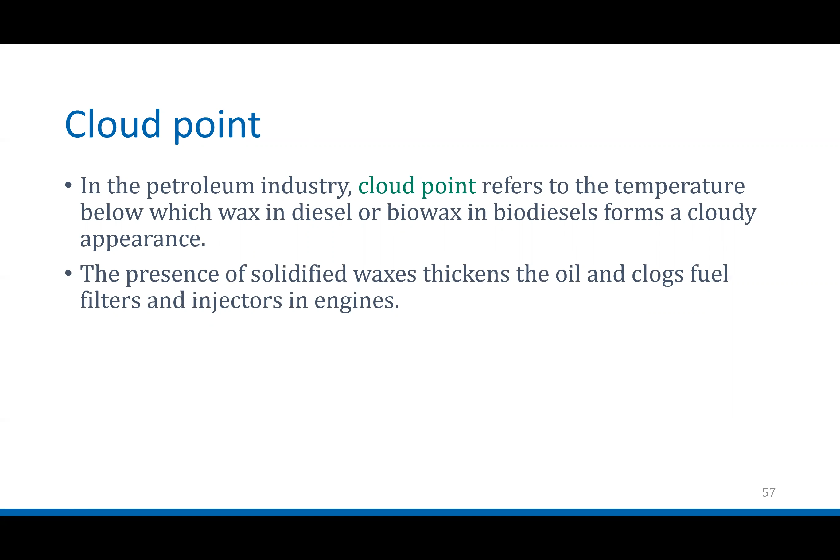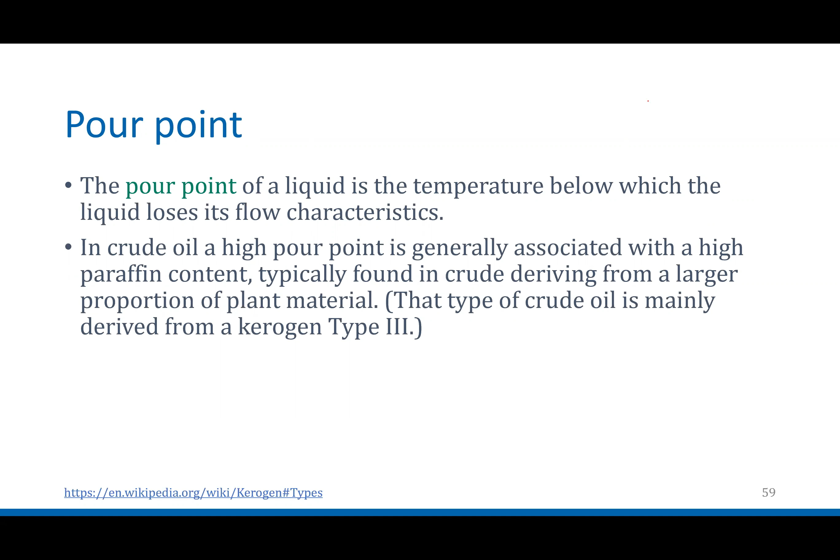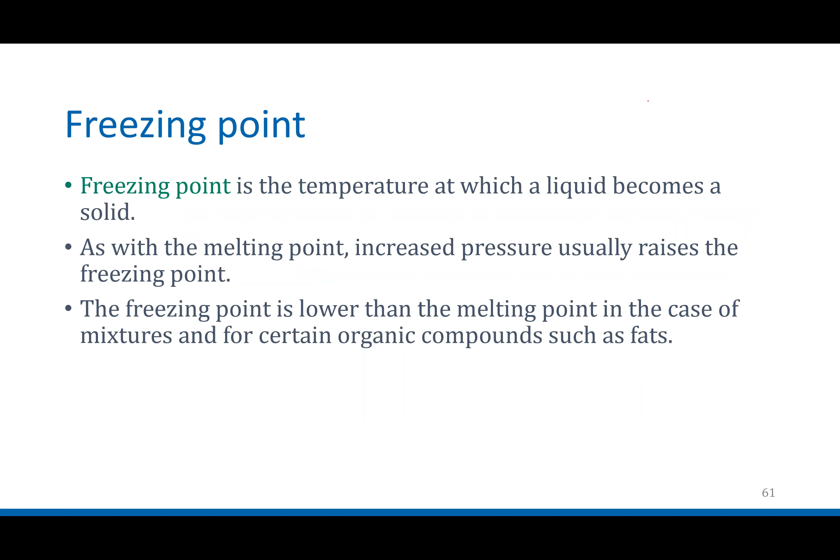This is the point - and when I say the word point, I always mean temperature. So the cloud point is the temperature when something goes cloudy. The pour point is the temperature in which something begins to not pour, it loses its ability to flow. Congealing point, the temperature where something congeals or solidifies. Freezing point, the temperature at which a liquid becomes solid, very similar to congealing point.

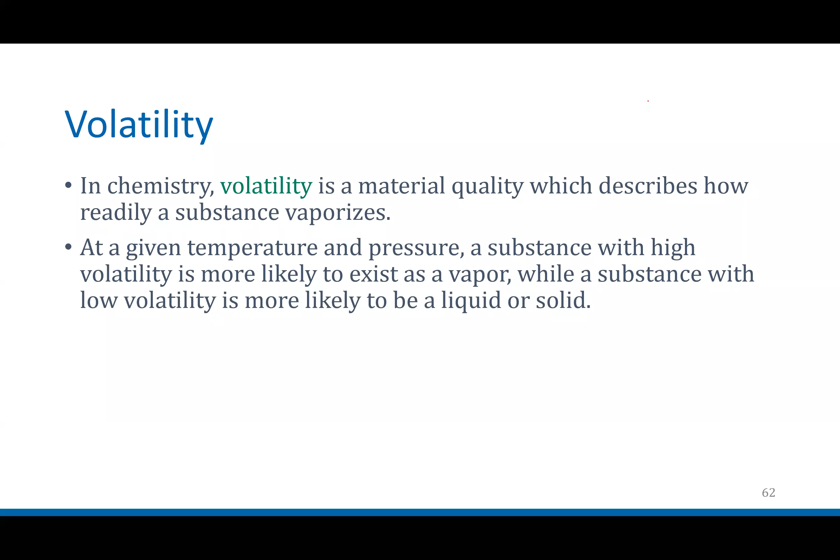Volatility is how easily a substance turns into a gas, which brings us to the flash point, which is the lowest temperature possible in which a chemical will catch on fire.

Which brings us to a safety thing, wink wink, kind of important to know. When a fuel or chemical has a low flash point, so the temperature it can ignite is lower than about 40 degrees Celsius, we call that a flammable chemical. So it's a safety hazard.

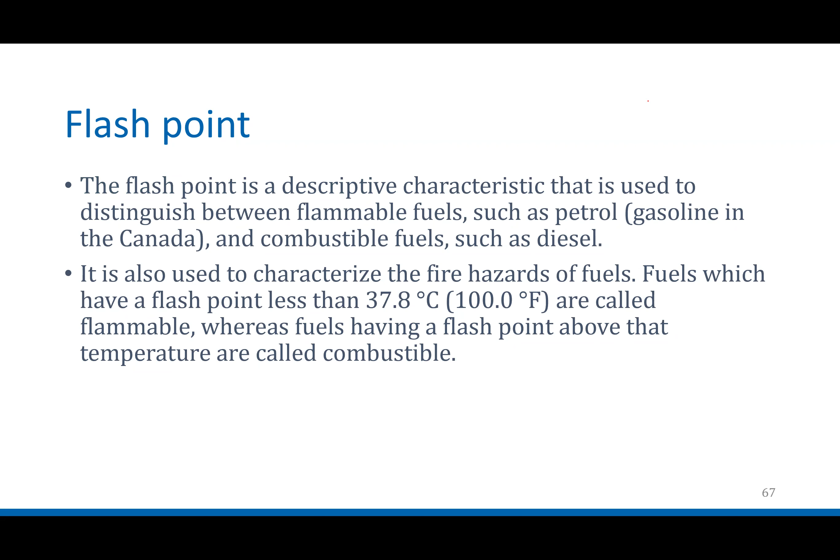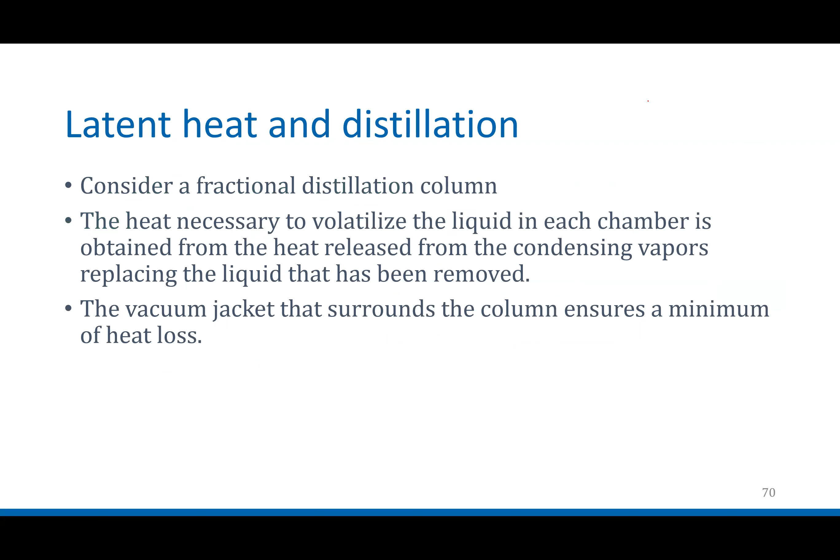And then we had specific heat and latent heat. These are related to the amount of heat something can absorb, and in particular, the latent heat of vaporization is the amount of energy something can absorb to turn into a gas.

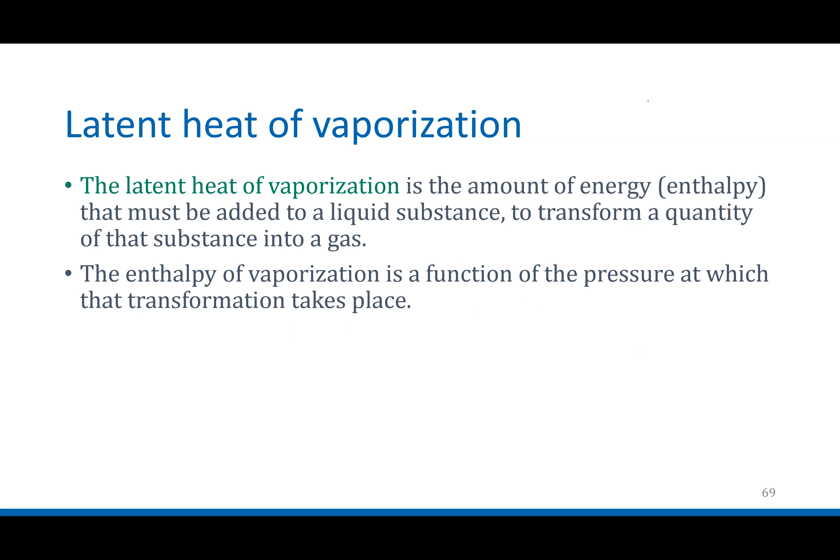So all pretty easy definitions. I just very quickly explained them all in, I don't know, 2 minutes. So let's get into this section. I would love to finish this today, this section, and then that'll get us ready tomorrow to get into the section that your lab will be on.

Okay, so physical properties of petroleum. Remember what physical properties mean - they are definitely not related to thermal properties. So this is like the other properties besides heat-related ones. So physical properties besides melting point and boiling point would include things like density, viscosity.

What else are we going to talk about in here? Viscosity, surface tension, and really that's about it. So it's a pretty quick little class today, I think.

All right, so the API density. Now, unfortunately for the rest of the world, the oil and gas industry still uses a lot of American standards and even American numbers. What I mean by that is, it might be different in the Middle East actually, because I've never really worked in oil and gas here, but I know in Canada, just like Qatar, we're a country that uses the metric system. So we would use kPa for pressure, and we would use meters and kilograms. Well, I know the oil and gas industry back in Canada is heavily dependent on the United States, so we use things like PSI for pressure, pounds per square inch.

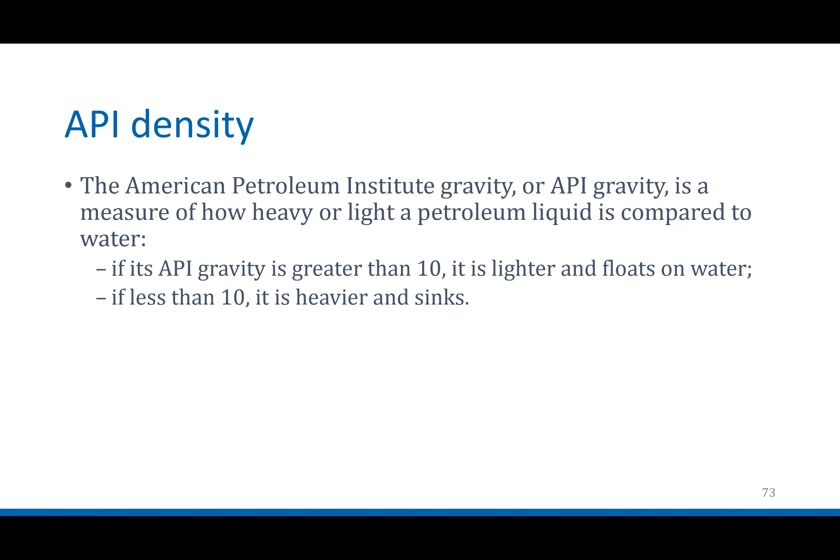And you guys should have done a course by now. Have you ever done a course, EN? I'm trying to think of the number. I taught it one time, like a million years ago. EN something something, like 27 something. It's a kind of an environmental course, but in that course you look at cleaning up oil spills. Not really relevant to this, but anyways.

So the API gravity, again, that's just density. Let me just check the chat here.

Yeah, EN 2480, that sounds really familiar. Years ago, 8 years ago, or maybe 7.5 years ago, it was one of my first semesters here, and they really needed some help in engineering. So I taught that course and another chemical process course. I think it was CH2420 or 2430. Very cool course, that one. Anyways,

So API gravity is commonly used around the world as an index. This is a number, a reference, for the density of a crude oil or refined products. So yeah, you can think of index like reference. It's the industry organization that created this, so it is used in different places in the world, even outside of the United States.

API is calculated using the specific gravity and then this formula here. Now, you do not need to memorize this, and we will not be doing this calculation in this course. The course outlines don't ask us to actually calculate this. We just need to know what it is, and you don't need to even memorize that formula.

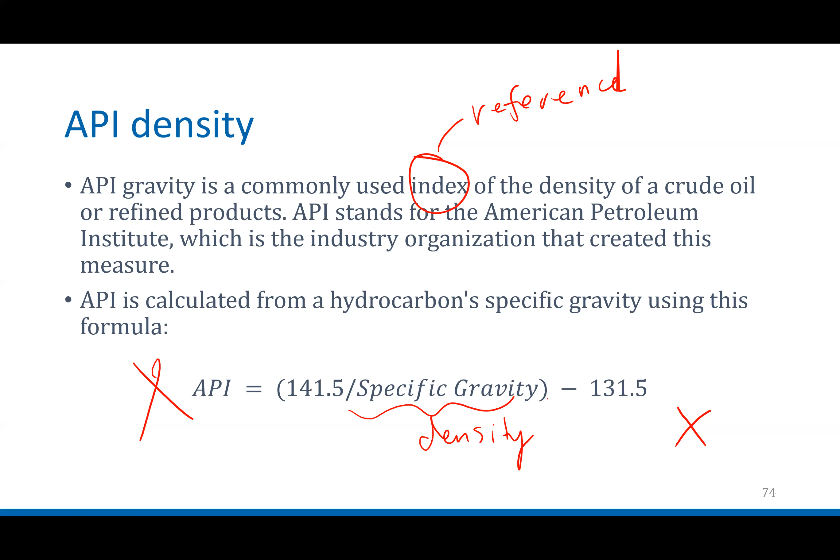But the formula is you take a number, 141.5, you divide it by the densities or specific gravity of the chemical, of the hydrocarbon, and then you subtract 131.5. No idea where that formula came from. Some crazy American mad scientists came up with it, but there we go. And you do not need to memorize it.

So this is why this is confusing, and we can thank the United States for this. The API density or gravity is an inverse - it's opposite of what we think, which just breaks my little chemistry heart. I don't know why they do this, but it's an inverse measure of the petroleum's density compared to water. Relative meaning compared. So what's the point? I've been kind of going on a rant about it, but what's the point? It's just a way to compare densities of petroleum liquids - how dense they are.

Now, in crude oil or something like that, these are obviously mixed together. We have nonpolar substances that form a mixture, a miscible solution, well, somewhat miscible solution. So it's a little harder to pick apart their densities. But when you mix something like a petroleum product with water, ones that are more dense will sink, ones that are less dense will float.

So a crude oil, now again, this is the interesting part about crude oil. It changes wherever you are. So the crude oil that we find in the Middle East is very different than say Northern America or Northern Canada. But typically, you can find them between 15 and 45. They use the unit degrees, but 15 and 45. These numbers, because they're greater than 10, will float on water. So there's obviously then not many crude oil products that are less than 10, meaning they would sink in water.

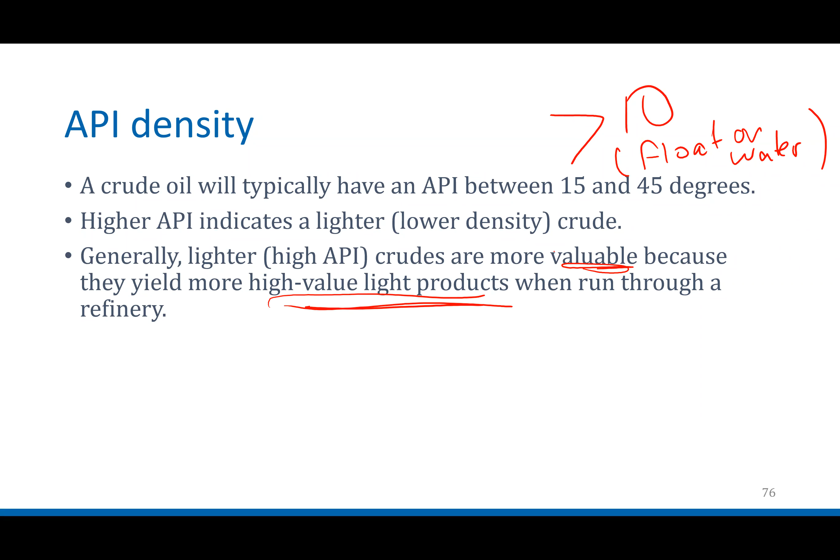Most crude oils in the world would float on water. Generally, the bigger the number - I think maybe this is where the Americans are going with this - the higher the number, the better it is, the more value. And that's, if you're thinking, maybe I shouldn't say this because I'm going to be on YouTube, but if you think about an American way to define something, it would be based on its value, right? And the higher the API density, the lighter it is. The lighter it is, the more valuable it is. So that's probably likely where the Americans came up with that number or this concept.

So this is a pretty, well, not that old - this graph is about 4 years old, maybe 3 years old. And it shows, now this is the best I could find, I couldn't find a very good global one. This is the lower 48 states, so this is everything in the United States, I guess, except for Alaska and Hawaii. But this is the distribution of oil based on their gravity or density for 2015 and 16. And you can see it almost looks like a bell curve you would learn in math, right? But you could see most of that crude oil is between, let's say, 35 and 45.

I wonder if I did a quick search, I don't know if I'll find anything. There are some things - I'm looking at QP, Qatar Petroleum's marketing site, and they have a really interesting PDF here that looks at some of their marine crude oil. The API gravity of this product, I'll send this to you guys in the chat if you want to open it, is between 32 and 31. So pretty valuable, pretty good result there. This is marine or offshore oil.

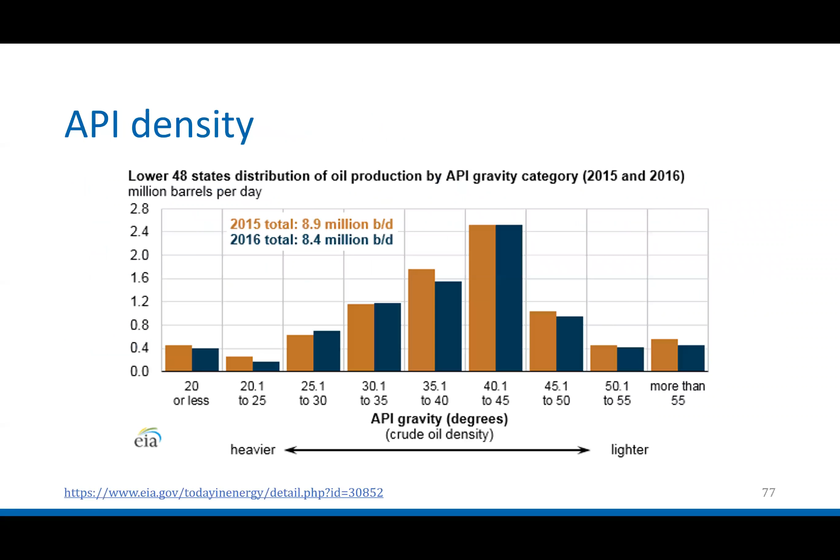Interesting fact about density: density is affected by temperature. Typically, the higher the temperature, the lower the density. Think about what temperature is and think about what density is. Temperature is the kinetic energy, the movement of the molecules in a compound. Density is the grams of that compound in a specific volume, could be liters or milliliters, typically.

As you heat something up, you're making the molecules move more - that's what temperature is, right? The kinetic energy, they're moving more. When they're moving more, the space between them can get a little larger. So for almost any chemical I can think of, when you increase temperature, when you heat up a liquid, the density decreases - you're increasing the space between the molecules.

So this is true for mostly water - water has a few weird exceptions - but this is true for most chemicals, and hydrocarbons or crude oil specifically is one of them. It's true. So crude oil densities and temperatures are found using standards from the API manual, which I got from this site.

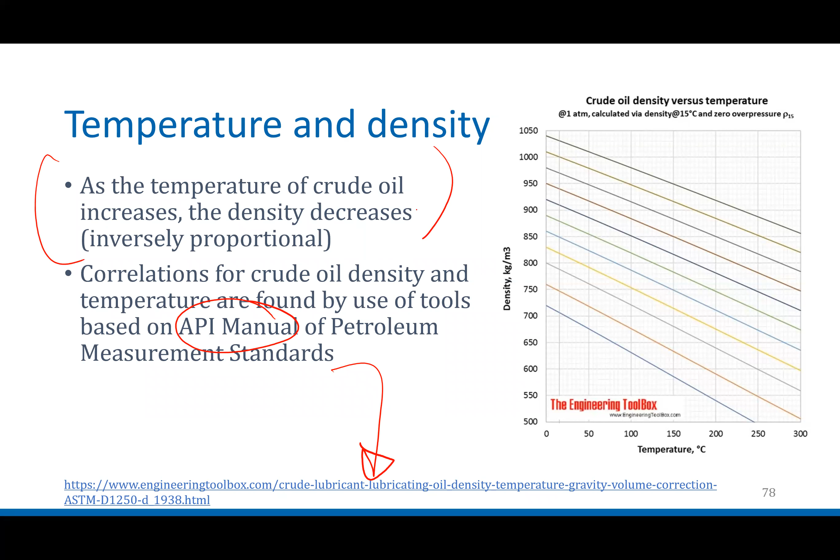You don't have to memorize this, but it's good to know that as the temperature of anything increases, the density typically decreases. Specifically, as the temperature of crude oil increases, its density will decrease.

Now, viscosity and kinematic viscosity. In this course we're more concerned with just viscosity. So what is viscosity? Most of you already know. The fancy definition is a fluid's resistance to flow, or resistance to deformation. It's the thickness of that liquid. Now, thickness is a subjective term. I don't mean thick as in length times width times height, not a volume. I mean its ability to pour.

Ability to pour. The easiest example, which I've used forever: compare honey, or maple syrup, but honey is probably a better example for the Middle East, compared to water. If you put honey in a jar and water in a cup and poured them out, the water would pour out much quicker. This assumes they're at the same temperature. If you ever have honey stuck in a bottle and want to use it while cooking, the easiest way to get it out is to put the bottle in the microwave or in some hot water. By heating it up, we decrease the viscosity, we make it less thick.

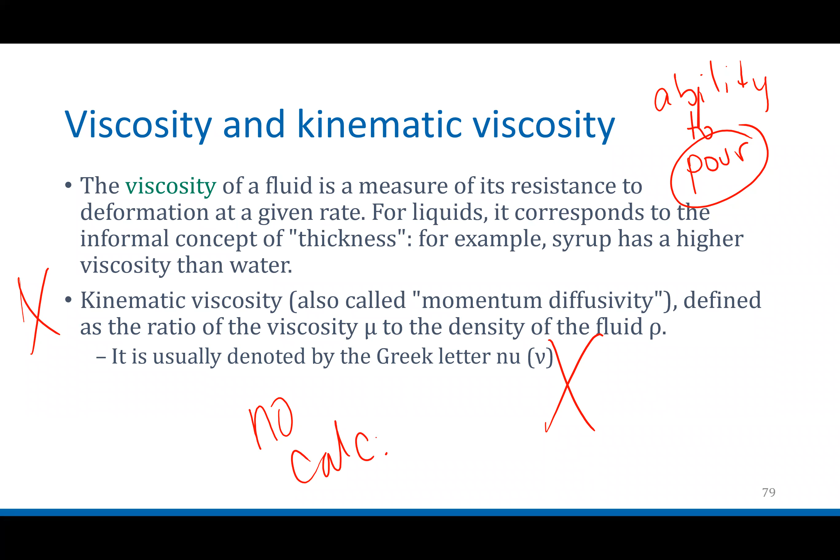So viscosity is the thickness of a liquid. If something is viscous, it's thick.

What are some factors specifically for crude oil that affect the thickness of something? More specifically, what are the principal factors that affect the thickness of crude oil? There are four things, let me skip the first one for a second. Temperature affects flow rate. If something is warmer, it will flow better. So one factor affecting the viscosity of crude oil is temperature. Think about working in northern Russia or northern Canada, where it can be -30 or -40 degrees Celsius, versus the Middle East, where it's typically +30 or +40 degrees Celsius. Oils will be more viscous, thicker, in cold temperatures.

Another factor affecting flow rate is the amount of dissolved gas. Typically, if something has a lot of dissolved gas, it would be a little lighter and flow a little faster. I don't mean like a foam with so much gas it becomes foamy, but generally something with more gas flows a bit better. Remember, gases have high kinetic energy. A dissolved gas lightens the liquid or solution and allows it to flow a little better.

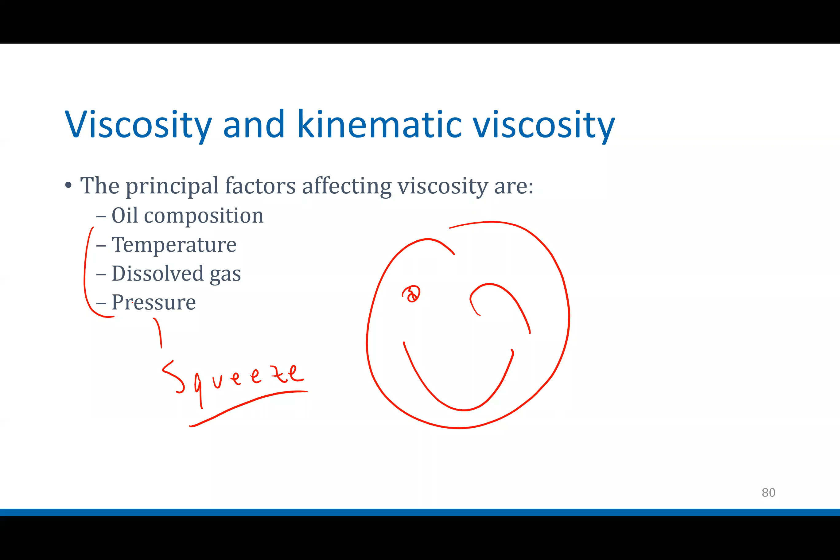So these are four factors that would affect viscosity: what is the oil made of, what is the temperature, what is the pressure, and is there a lot of dissolved gas in that chemical or in that crude oil?

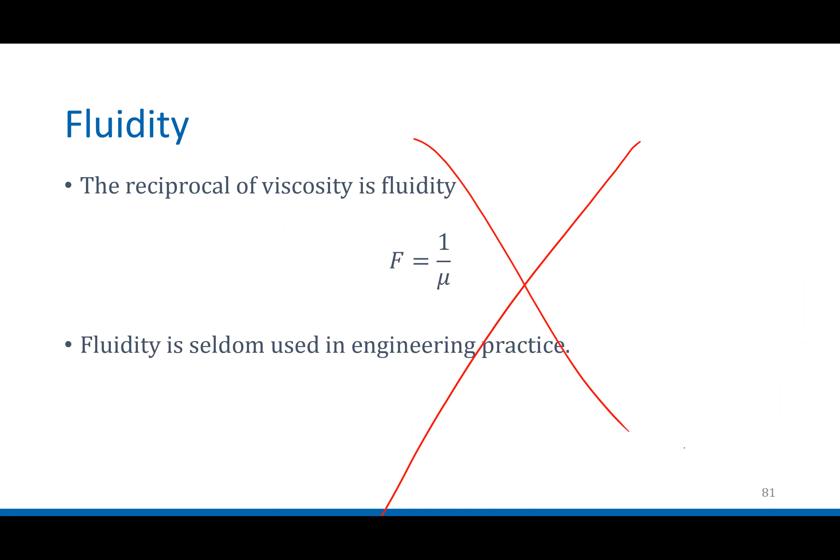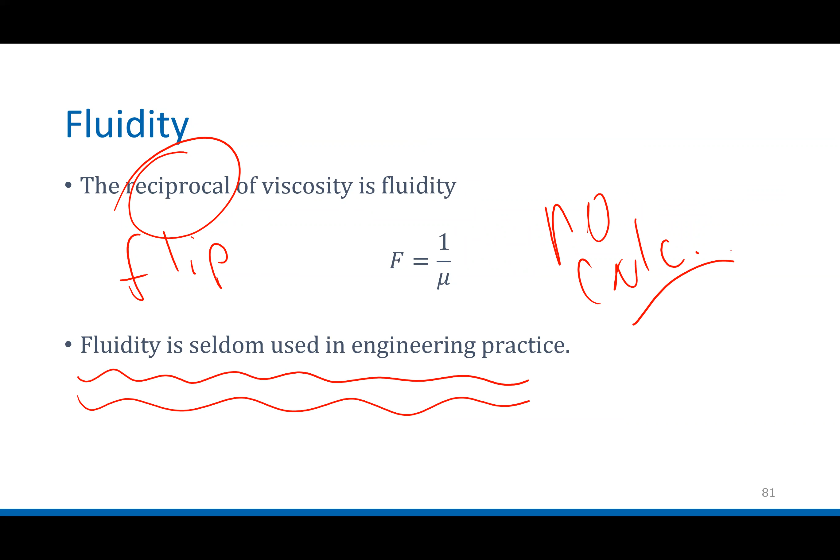Okay, fluidity, guys, you do not need to know this. This is in your outcomes. Fluidity is the reciprocal - reciprocal kind of means flip in math. This is in the outcomes in your course, but from my research, fluidity is seldom used in engineering practice, and there are no calculations in this course. So we can ignore fluidity. It is in your notes, you might hear about it someday. It is the inverse of viscosity, but don't worry, you don't need to know fluidity.

So I'm going to go on. I'll do two more slides on viscosity, and then I'll quickly get into surface tension and we're done. I hope everybody's doing okay. I know this is a little boring compared to chapters 1, 2, 3, and 4, where we had to do lots of naming and reactions, but it's kind of interesting.

Okay, so viscosity in oil. A very common occurrence in the oil and gas industry is a two-phase flow in your pipeline. Now what does that mean? I should say this is common in the petroleum industry, but other industries as well - chemical, geothermal, even nuclear, which I don't know too much about. So what is a two-phase flow?

Well, it's when you see a mixture of gases and liquids. We'll talk more about what that type of mixture is in the next section, but a gas and liquid two-phase flow happens in a lot of industries. So what I mean is the liquid that you're putting through a pipe has dissolved gas. If you don't know what dissolved gas is, that's fine, but every one of you has experience with it because I'm sure at some point in your life you drank Pepsi or sparkling water or Coke or something. That's dissolved gas. It's when you take a liquid - so like Pepsi or Coke is just sugar water basically, with coloring - and then they put carbon dioxide into that.

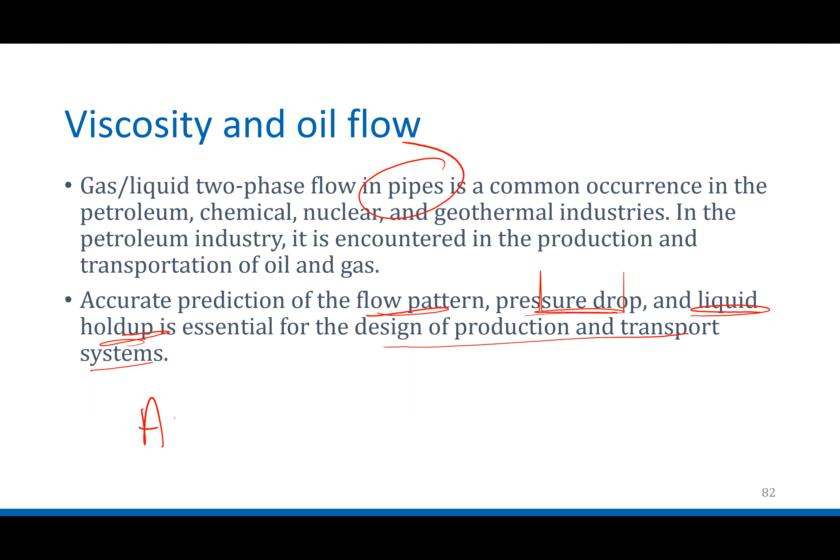Anything that disrupts flow can cause a problem. It can clog a pipe, it can cause a backup, it can make an oil spill happen. So really anything that can slow or stop flow can cause huge problems.

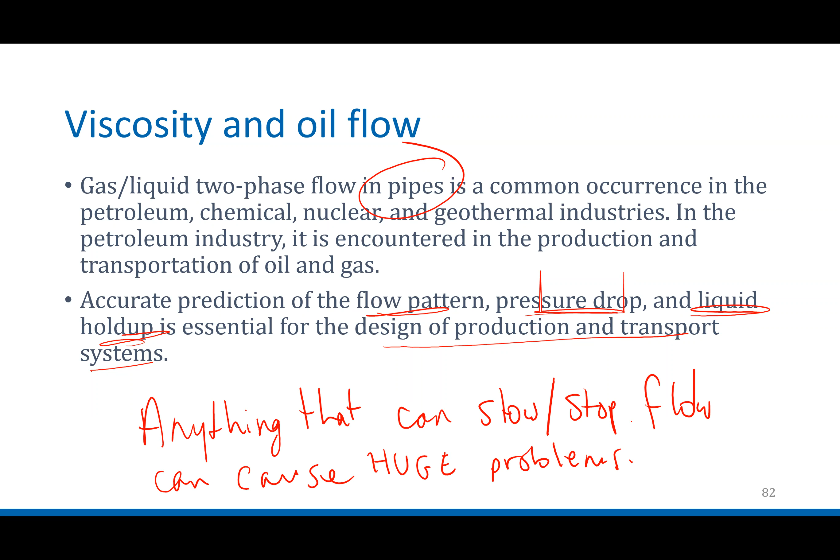You can think of it like a traffic jam. Now I gotta say, and I don't know if you guys agree with me, COVID aside, I found in the last 8 years I've been here that the traffic in Qatar has been getting better - not amazing, definitely not amazing, but definitely getting better. I remember 8 years ago, the traffic on the expressway, the D ring, used to take me an hour to get to work. Now I don't live in the same place anymore, but I find the expressway a little less congested, especially with all the work they're doing.

So all of that construction that they're doing on the roads, even the metro and trams and flyovers, that's to help the flow. And cars on a highway, that's just like oil in a pipeline. And if you have a traffic jam, it can cause problems - there can be accidents, braking, people get really mad, it costs people money. So you can kind of think of oil flow in a pipeline like a highway or an expressway, and if you can have consistent and safe flow, it will save you time and money.

Here's the thing: any flow model that a chemical engineer would look at when considering fluidity and flow rates would consider viscosity, or thickness of oil. This is an intrinsic variable to consider when talking about the flow rate of oil. Two-phase flows, which is beyond the scope of this course, occur when looking at an oil and gas mixture, which behaves differently than higher viscosity oils. You don't need to remember this specifically, but just know it's a challenge for chemical engineers to make flow models or predict flow rates with oil and gas without considering viscosity.

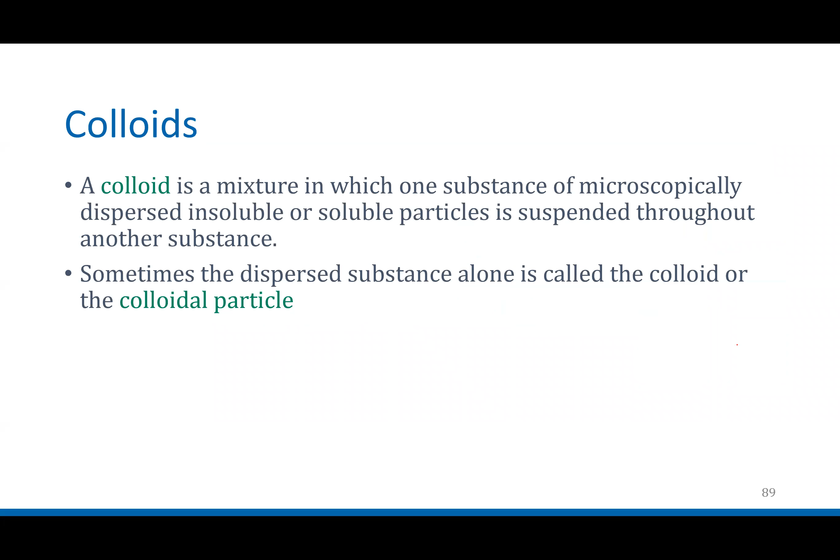I don't know if I'll get this finished. What I might do is just talk about this quickly, because these four slides directly link into my favorite section. Since it's almost 10:15, maybe I'll introduce this and then we'll review surface tension tomorrow and get into my favorite chapter, section 5.13. Love this chapter, and this is what your lab number 6 will be on. Once I get that video uploaded, it'll cover this chapter.

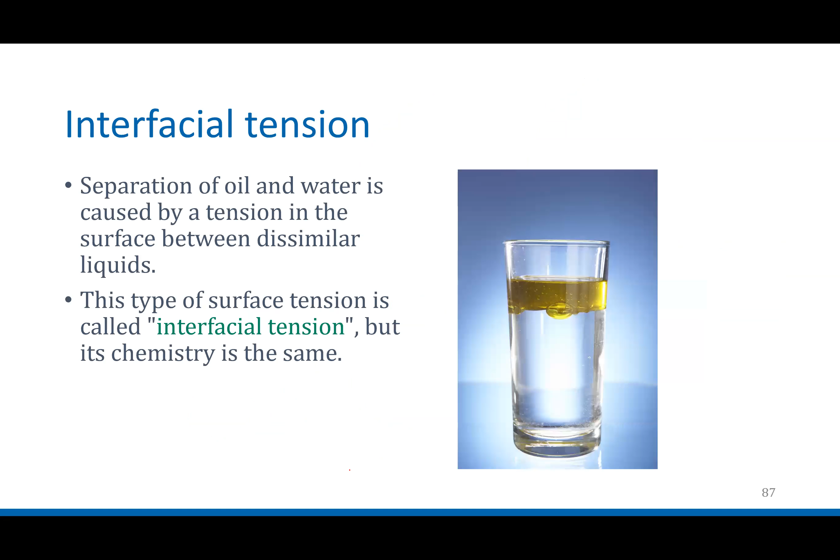Really fun experiment. All right, so surface tension—I love surface tension. It's useful in cooking and a lot of natural sciences because it directly relates to water, which has very high surface tension. So what is surface tension? It can be complex to mathematically explain, but it's the tendency, the behavior of the surfaces of fluids to try to shrink into the minimal possible surface area. This has to do with intermolecular forces, how molecules are attracted to each other. Surface tension is one of the really interesting properties of water, which allows it to form droplets or beads, sometimes on things like a waxy leaf.

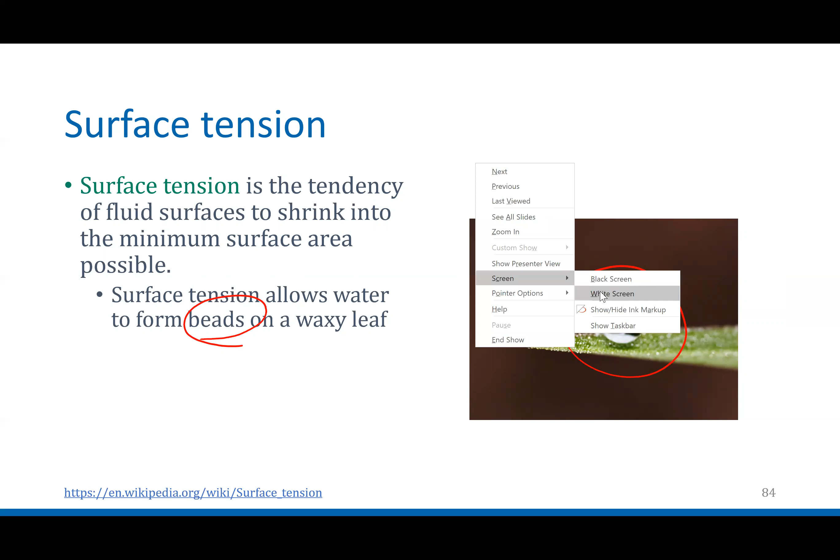If you guys want to see surface tension right now in your kitchen, you can do it after—or if you're not home, later. It's really easy: take a regular glass, like this one. I'll hold it so we're looking at it straight on from the side. Start to fill the glass up with water, pour your water in, and once it gets to the top, very, very slowly add more water.

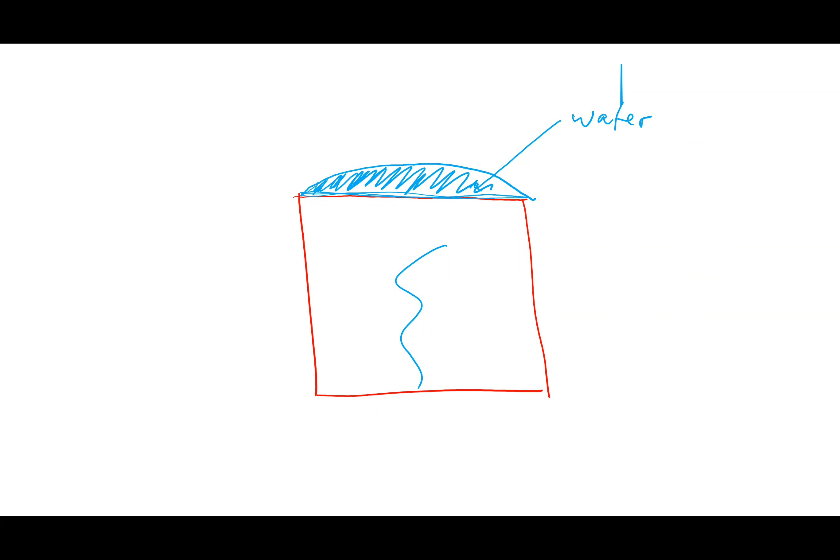Most solutions with lower surface tension or lower intermolecular forces would just level off, and any more liquid poured in would go over the edge. But if you're careful enough with water, you can actually see something different happen. This doesn't occur with every chemical, but it certainly happens with water—it will form a small dome over the top of the glass before it starts to pour over the edge. That's because water has high surface tension; the surface is tight and attracted to itself, so rather than break and pour over immediately, it forms a dome. If you add too much water, it won't be an infinite dome, but you'll get a small one, and any more water added will cause it to fall over the side. That's related to surface tension.

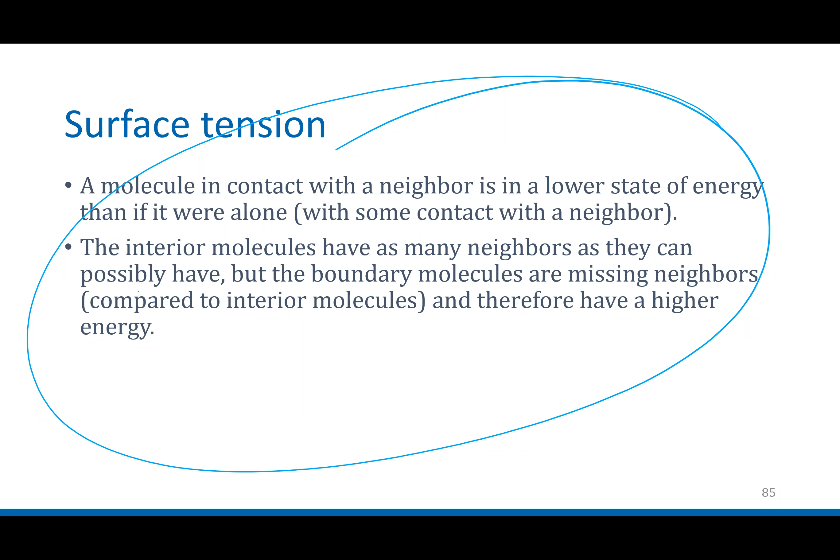The definition of this is crazy, but we'll look at it tomorrow since it's 10:16 and I think that's enough for today. Tomorrow I'll explain a little more about surface tension, and that will bring us into the next chapter, which is all about surface tension.